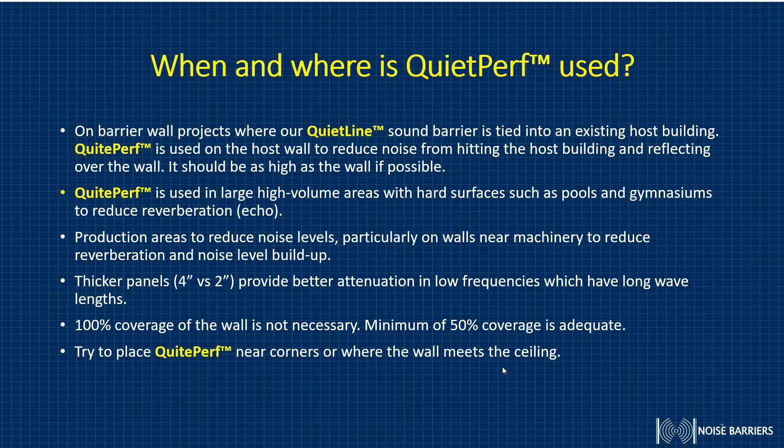Sound absorptive systems come in 2-inch, 3-inch, and 4-inch thick panels as standard thicknesses. Additional thicknesses may be supplied if requested.

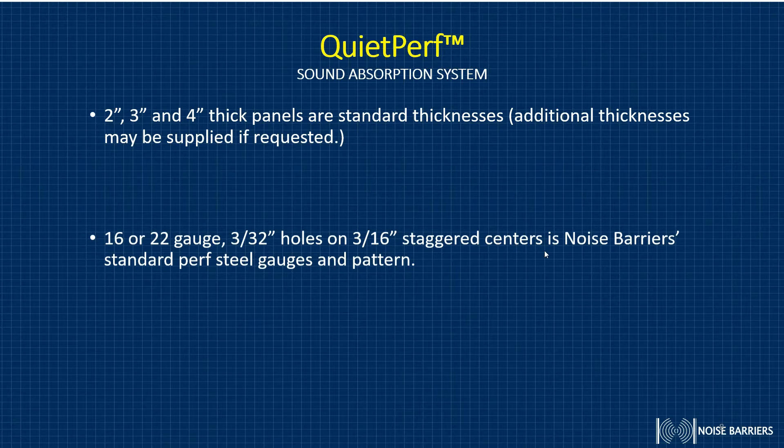16 or 22 gauge, with a 3/32 hole on 3/16 staggered centers, is the Noise Barrier standard perf steel gauge and pattern. Material types include galvanized steel, galvanneal steel, stainless steel, and aluminum. A flat or V-ridge style is also available—we'll learn more about the V-ridge style further down in the webinar.

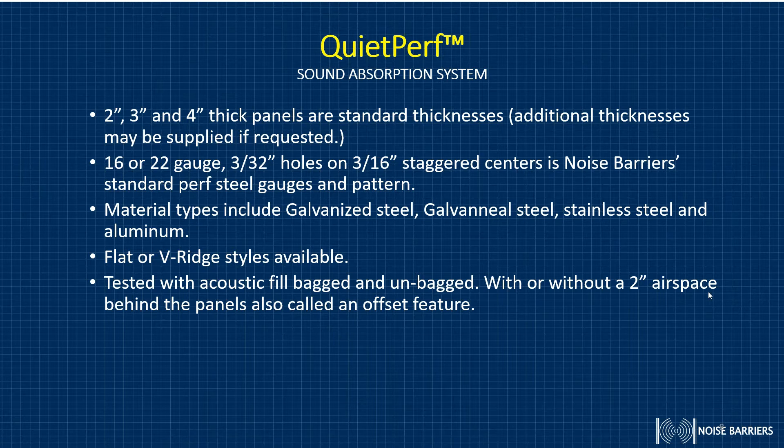Panels are tested with acoustical fill, bagged and unbagged, with or without a 2-inch airspace behind the panels, also called an offset feature—we'll discuss that further down. They've also been fire tested for flame and smoke per ASTM E84. Please refer to the following slides for a chart of test reports for absorption panels.

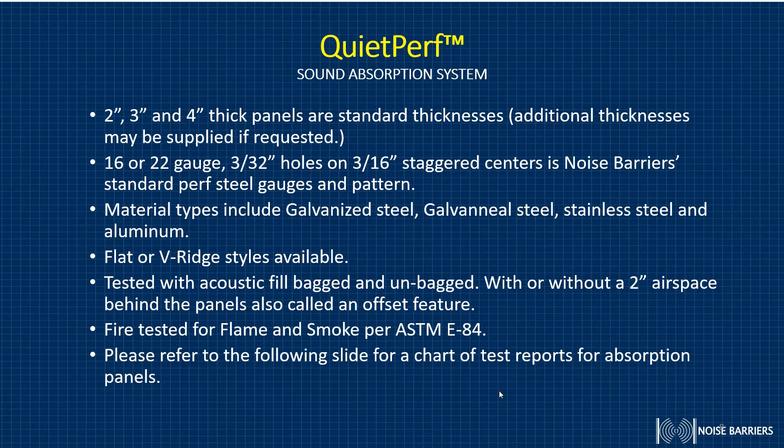Here's some test data for you: NB2 steel, NB2 with a 2-inch offset airspace, NB2 aluminum, NB2 bagged, NB3 steel, and then NB4 steel, NB4 with the 2-inch airspace, NB4 aluminum, NB4 bagged, and NB4 in the V-ridge style.

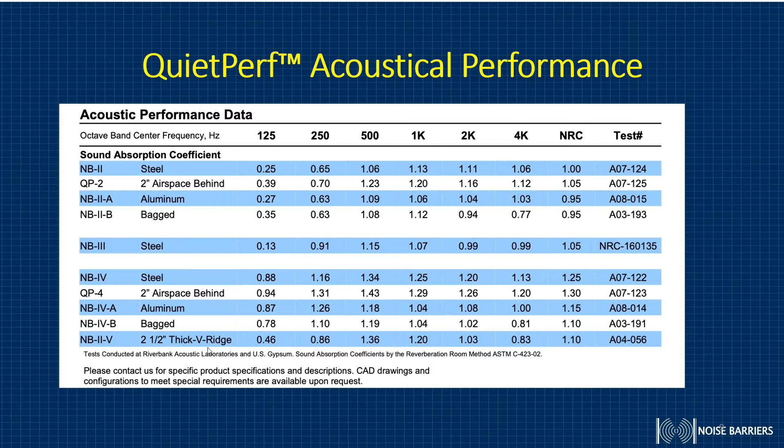Standard panel sizes: for the 2-inch thick panel, widths of 18, 24, 30, 42, and 48 inches. For the 3-inch thick panel, widths of 16, 22, 28, 40, and 48 inches. For the 4-inch panel, widths of 14, 20, 26, and 38 inches. For the V-ridge panel at 2.5 inches thick, widths of 18, 24, 30, 42, and 48 inches. Custom sizes are also available.

Max lengths are 12 feet—that's our standard. For longer options, contact the factory. Other optional features include factory framed openings and notches, which we'll learn more about further down in the webinar.

Mounting options: the first mounting option is the flush J and Z style, which sits flush to the wall. The second mounting option we offer is a 2-inch offset. We also offer a 4-inch offset.

The bracket types: J at bottom and Z at top is standard, or J at bottom and upside-down J at the top with a longer front leg. This makes the panel easier to nest into the lower, shorter J. There's also Z and Z style install.

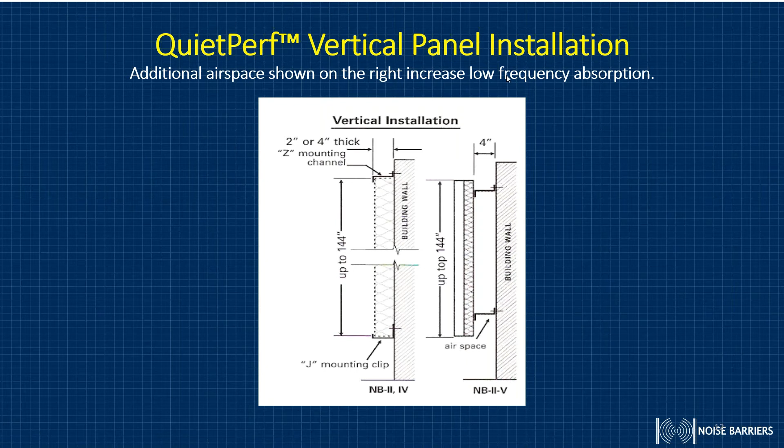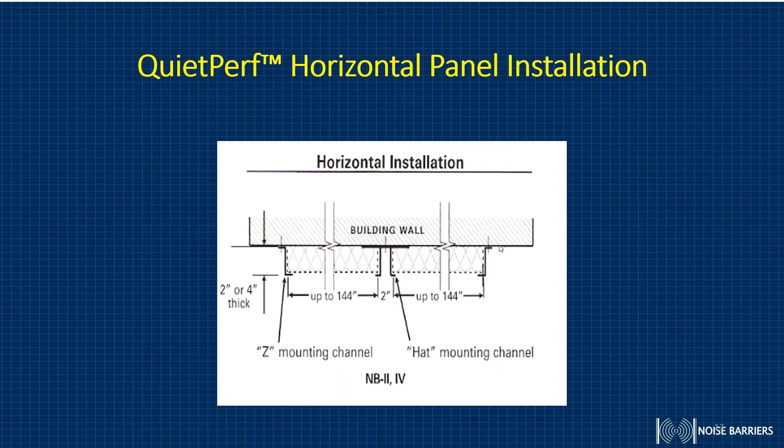This also helps in lowering frequency, increasing low frequency absorption on the right-hand side if you have an offset like this. Horizontal installation - here's a good horizontal view, and we'll see this in a couple pictures further down in the webinar. It's a Z-style bracket with a hat channel style, with the Z-style on the other side encapsulating the other end of the panel.

The framing can be done in the field or in the shop, depending on the proper dimensions provided. They're not difficult to do in the field. We can also provide the flashing required in order to do it in the field.

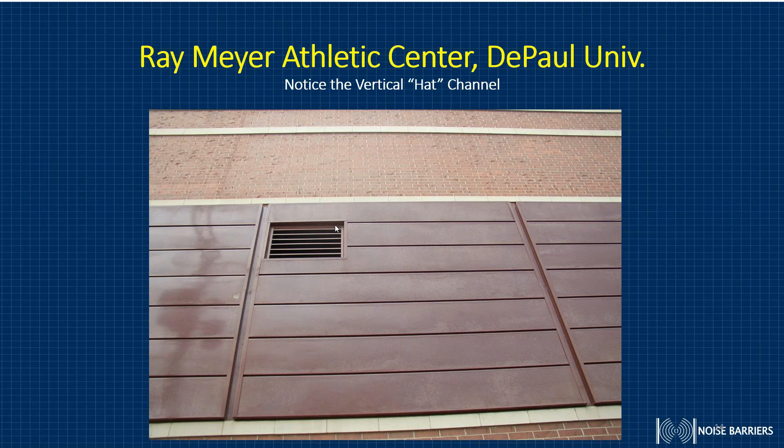Perforated panel sizes and finishes: round 3/32 by 3/16, 22% open is the standard. Slotted 41% open area is more for an architectural setting. Refer to the perf option sheet.

There's a perf option sheet where you'll find different styles of perforated patterns that we offer. Panel finish: powder paint is the standard, offered in gloss, matte, textured, and also clear coated finish.

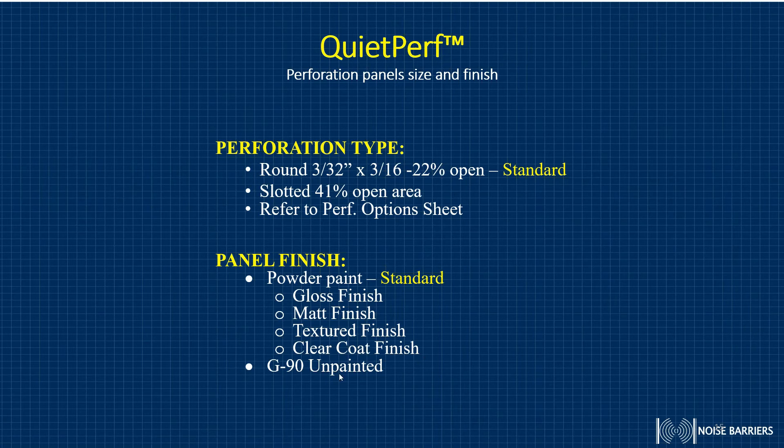So you can still see the metal, whether it's galvanized, galvanneal, aluminum, or stainless steel, in just a clear finish. G90 unpainted galvanized is available for the exterior.

QuietPerf panel types: open end standard, so both ends are open, just folded on the vertical lengths. End caps, where you encapsulate the top and the bottom of the panel. And then the V-ridge style, which we'll show you further down in the webinar.

Finished four-sided perf, so all four sides of the perf are bent in, which creates the channels around the perimeter of the panel itself. Frame four-side solid border, pan style for ceiling grid systems. Hanging baffles are also available, with an optional cloud kit.

Here's a good example of your NB2 panel, bagged or unbagged with the top and bottom end open. Here's an NB4 panel, just a different thickness - 4 inch. Then you have the cloud panel in 2-inch and 4-inch bagged versions, and you have the baffles in 2-inch and 4-inch.

The baffles are typically used on a barrier wall system where you have an HVAC system that's still accumulating noise after you've barricaded it with the barrier wall system. You can install this in between as a baffle system to help reduce that reverberation.

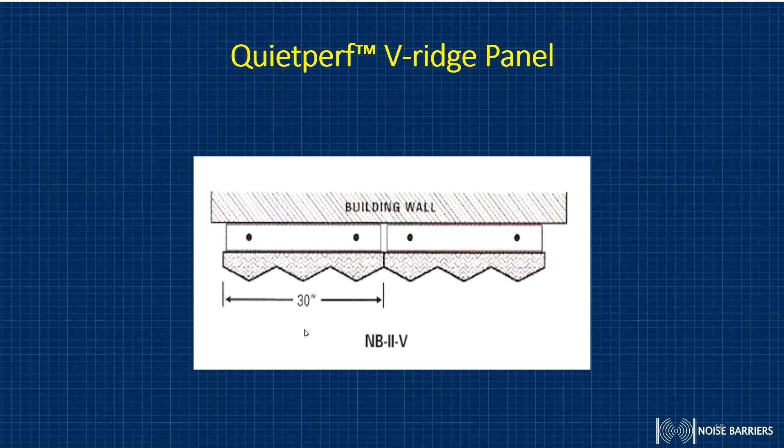Here's the NB2 with your standard perf, J and Z style, next to some machinery, right closer to the top of the ceiling as recommended. This helps with any reverberation or high frequency.

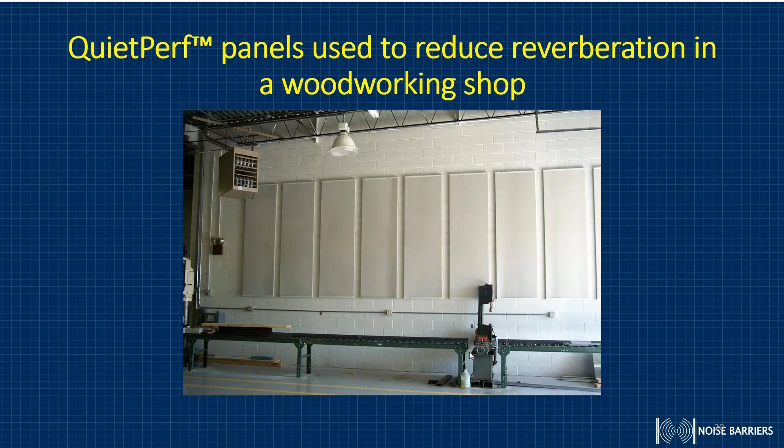QuietPerf NB2 panels used to reduce reverberation on a rooftop unit. All these have different styles of installation - you have the hat channels running vertically here, and some areas we'll learn about further down where they're installed horizontally.

As you can see, it's hard to get all these dimensions for all the electrical that's going to be coming through the walls or piping. So a lot of it is done in the field with a simple tin snip cutter all around the perimeter, and then we can provide the flashing to cover up any rough or sharp edges.

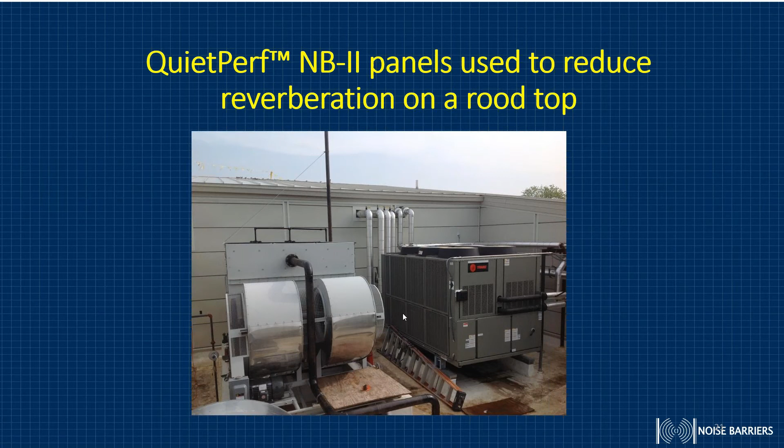There was still noise coming through there, so we dressed that up with some of the NB2 panels, and you can tell a lot of them were notched out in the field. Here's a couple more of the interior of the wall, the actual host building wall, and you can tell where we notched out for some electrical wiring for lighting. Here's a closer picture of that.

This is just a close-up of the Z-style installation with the J bottom.

Here's another barrier wall we did in Glencoe, Illinois. Same thing: we put NB2 panels and a barrier wall around the perimeter of an HVAC enclosure, and there was still some noise interrupting the nearby residents, so we added more NB2 and NB4 panels around the perimeter.

You'll see how they're mounted horizontally here, and vertically. And you've got some notches here for the electrical.

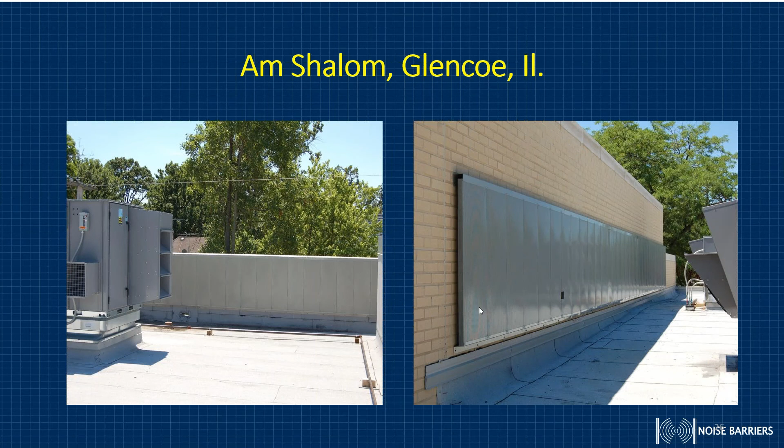As you can see, there are residential areas in the background here. We added some perforated panels along that wall to help with noise reduction, and here's some installed in the horizontal position, to reduce the noise from going into the residential areas.

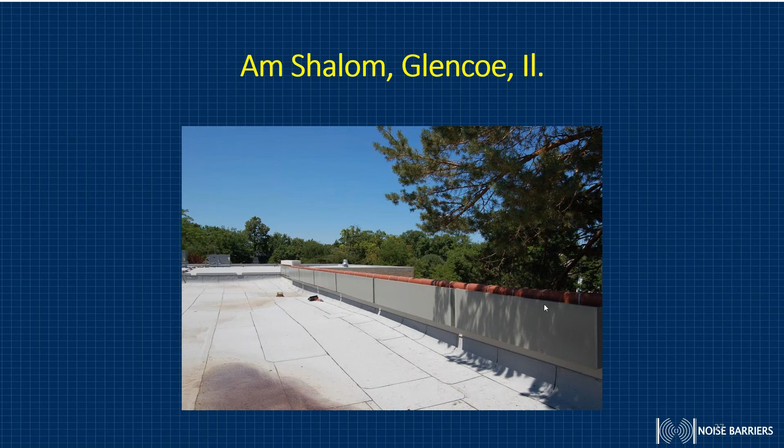Here's a good one of a chiller pit we did. It gives you a little more of an idea of the notching on the paneling system. You can tell we can do these specialty panels in sizes, shapes, and forms at this factory if all the proper dimensions are provided.

Here's another barrier wall system we did in River Forest, where we had to address the host wall again because of the hard surfaces. Here's some more hat channel style installations with the Z encapsulating either end.

This is just a simple ZZ installation here. Another view to give you an idea of the bigger cutouts. You have multiple panels going up the wall here with a bigger cutout, and again, this is either done in the field or in the shop.

Just a V-Ridge panel that we were discussing earlier. Here's a good picture of the front face of it and how it looks, and it's also being used in the ceiling, as you can see here, along with the electrical penetration like I discussed earlier.

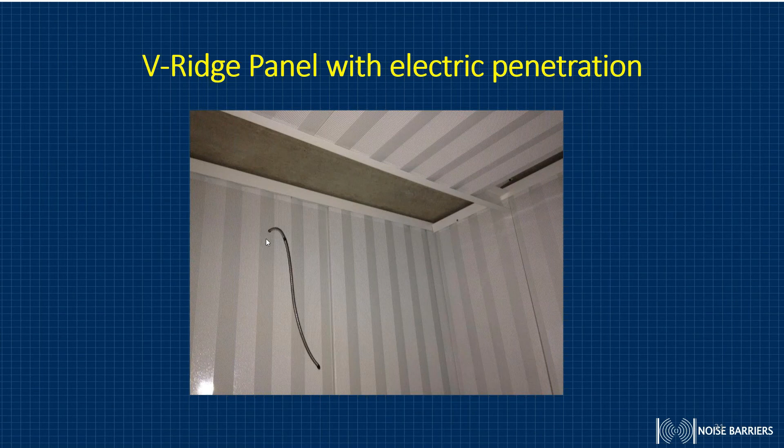Here's the same area for a V-Ridge panel. You can tell it's on the rooftop and the walls, with all the punctures we did for the electrical outlets to dress up the actual host room.

In an enclosure like this, we had a client who had 2 of the existing walls, and we just provided the 1 wall for him, then encapsulated his whole enclosure with NB2 V-Ridge panels to help reduce the noise levels.

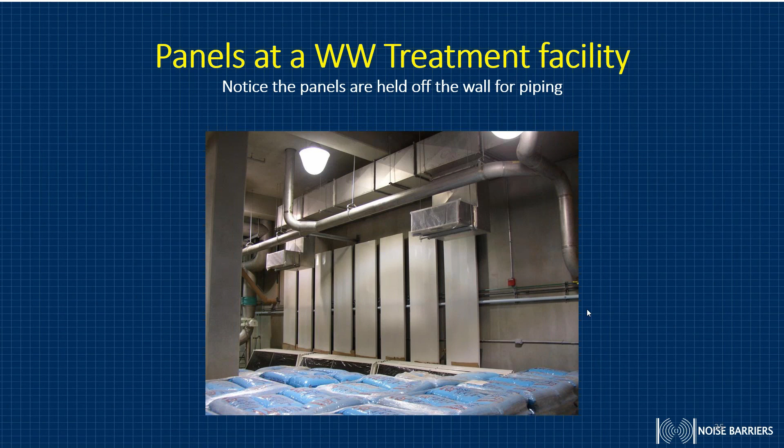Summary: QuietPerf sound absorption panel systems. Our QuietPerf panels are available in a variety of thicknesses, widths, and lengths, and in many perforated patterns and several end cap designs to meet your aesthetic and acoustical needs.

Noise Barriers offers technical support and representatives with the experience necessary to assist you in the design, supply, and installation of our sound control panels. They feature a durable powder paint finish from our standard 6 RAL colors. Custom colors are available, and panels come in galvanized, galvanneal, stainless steel, and aluminum, with the longest warranty in the industry: 5 years on the material.